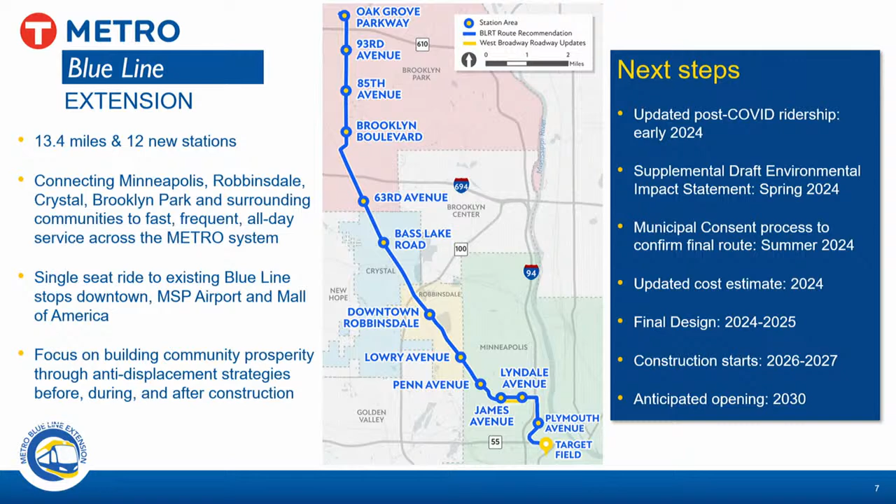We are working on post-COVID ridership, which will be ready by early 2024. The Federal Transit Administration wants us to do a blended ridership approach of pre-COVID and post-COVID ridership, as required in their modeling, and we're gathering data right now on the post-COVID condition to blend into that. You'll see that from us hopefully by the beginning of next year. I'll skip ahead on the rest of these items since I'll cover them in other slides.

We keep trying different routes and avenues to get to people because that's what we ultimately wanted to hear. We want to hear from you whether you support the project or not. We want to get those voices at the table. So we continue to adapt.

And then, of course, our anti-displacement work group. As I mentioned, there is a very complete summary of the quarterly engagement meeting in the packet, conducted August 23rd at the Capri. It was a corridor-wide presentation, followed by Q&A, and all of the Q&A are summarized in the packet provided for you today.

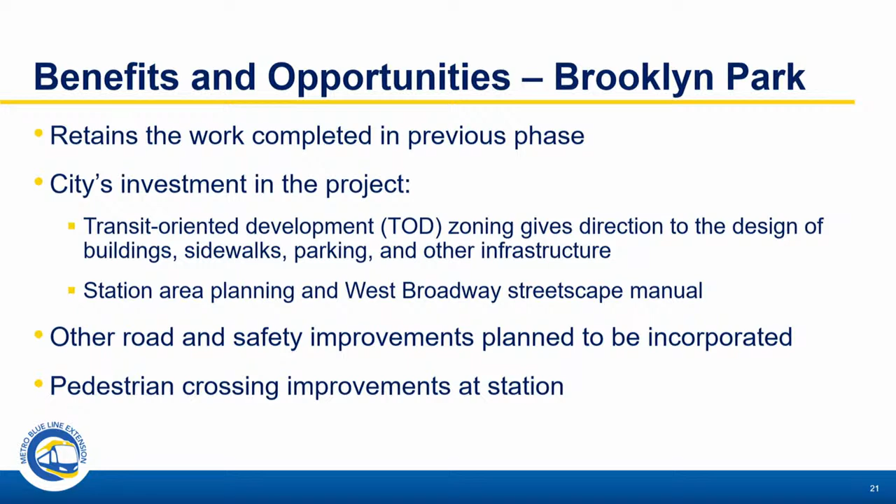We'll start up in Brooklyn Park, which is the area of this Blue Line extension that remains closest to the previous alignment we had before. Anywhere north of where we switched over to West Broadway stays pretty much the same. So we've already got a lot of TOD work, station area planning work, and West Broadway streetscape work that was done in previous years. That remains and continues to be part of what we're doing and moving forward.

We also have a station at Brooklyn Boulevard, with many residents there, also major retail destinations in and around there, and the Liberian Business Association's incubator, working with the city right at that stop as well. And then, of course, the fifth and southernmost stop, which is in Brooklyn Park but really serves residents from Brooklyn Center, Brooklyn Park, and Crystal, right in and around 63rd. These are the benefits and opportunities that are there.

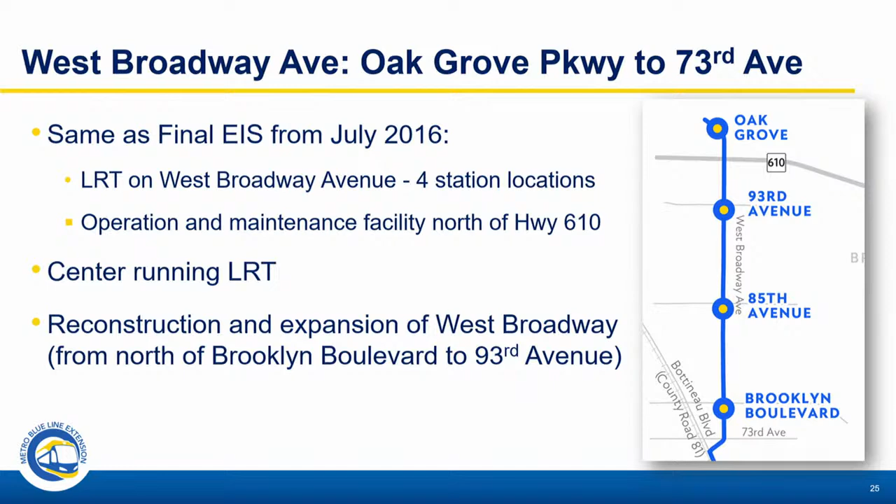The four stations along this segment start at Brooklyn Boulevard, which has a heavy bus connection, the Starlite Transit Center, and retail areas. 85th Avenue has North Hennepin Community College, the Hennepin County Library, and new housing being built. 93rd has a couple of hotels nearby, Takeda, Olympus, and other job opportunities. Oak Grove Station is the north end of the alignment, with a fairly good-sized north-end park and ride, opportunity for adjacent development, and the operations and maintenance facility located north here as well.

This is a reminder that this project had assumed building the operations and maintenance facility on existing City of Brooklyn Park property. Here's a rendering and drawing of where that is, on the relocated 101st, tying into a new Oak Grove Parkway connecting over to West Broadway. Just off-screen to the north is the fairly new 169/101st interchange. This is really the north end of the project with our building—this design is essentially completed, needs to be dusted off and put back in, but we'd still look to implement this operations and maintenance facility at the north end of the project.

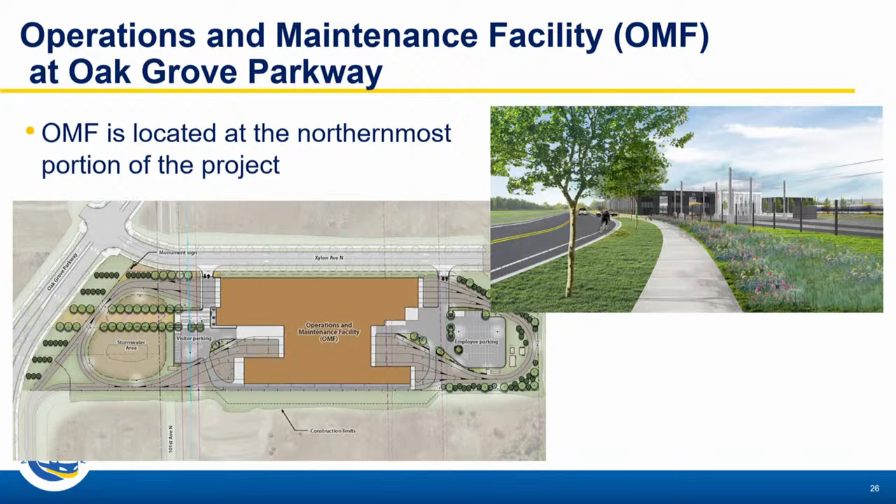This becomes the north end of the alignment. Do we have a comment here?

Very quickly—you mentioned their station area consultants. Do the stations not have all the same consultants, or did I mishear?

In round one, station area planning was done for each of the five cities—a couple of different consultants worked on it—covering Minneapolis, Golden Valley, Robbinsdale, Crystal, and Brooklyn Park. Brooklyn Park's planning mostly stays in place. We did some new station area planning in Crystal and Robbinsdale, and now we want to tackle station area planning around the Minneapolis stations as well.

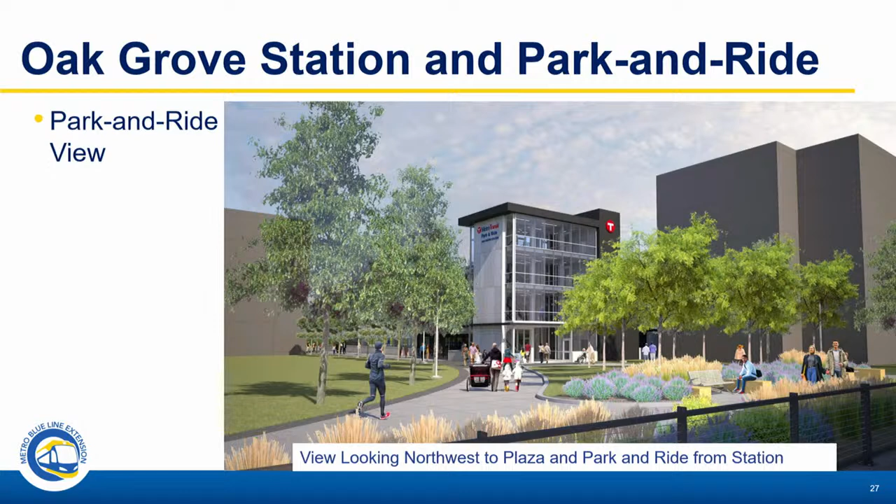So, Councilmember Kasham, you had a quick comment? Yes, and it's related to the Oak Grove station, Chair.

Okay, just go back for a second. So those black building structures that you said would have potentially underground parking, if I'm understanding correctly, would those black building structures potentially be businesses, or like retail, or multi-use? What is the concept of those buildings?

Chair, council member, that'll depend highly on City of Brooklyn Park's redevelopment efforts and land use planning in and around there. The property up around there is all owned by Target Corp. So when we've laid this out, we've laid it out to identify a roadway backbone and a light rail track backbone and a location for a park and ride, adjacent to the station, adjacent to the tracks, and adjacent to the roadways in that area. There's additional detail, how that all lays out and how it gets developed is going to be highly driven by the planning that takes place between the property owner, in this case Target, and any of their developers and the City of Brooklyn Park.

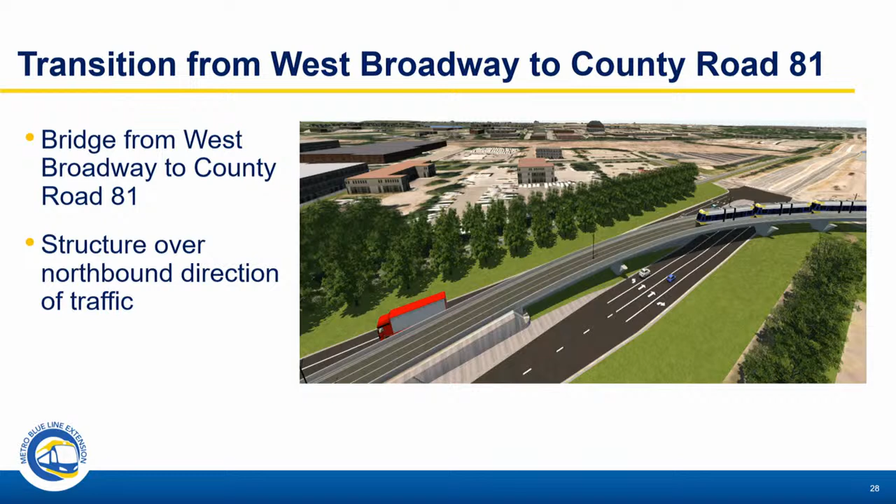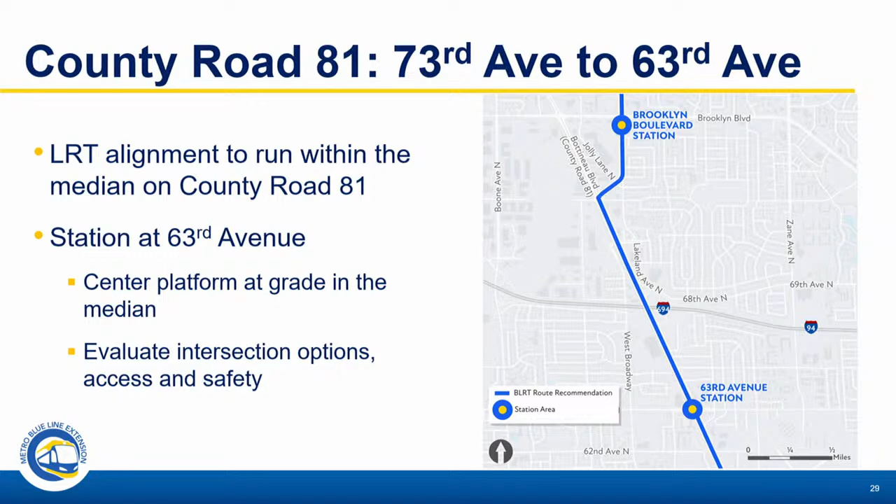It is the north end, so it's meant to capture potential riders from all the northern area. We're down past West Broadway, now onto Highway 81 for the first time, where the alignment differs from previous plans. We're close to the original alignment here in this piece of Brooklyn Park. We transition between north of 694 and 63rd, with center-running LRT on County Road 81, with a station at 63rd in the center of County Road 81 rather than on the railroad alignment next to it.

This rendering shows how we integrate the existing parking structure at 63rd, the Bottineau parking structure along 81. In the previous design, we had a Skyway bridge over the Burlington Northern Railroad tracks coming down onto the station platform. Now, since the platform is in the center of Highway 81, we have a Skyway bridge from the second floor that goes over both the BNSF railroad tracks and southbound County Road 81, then comes down onto the station platform. There's also an at-grade signalized intersection providing access for all quadrants at 63rd and County Road 81, as well as the 63rd station.

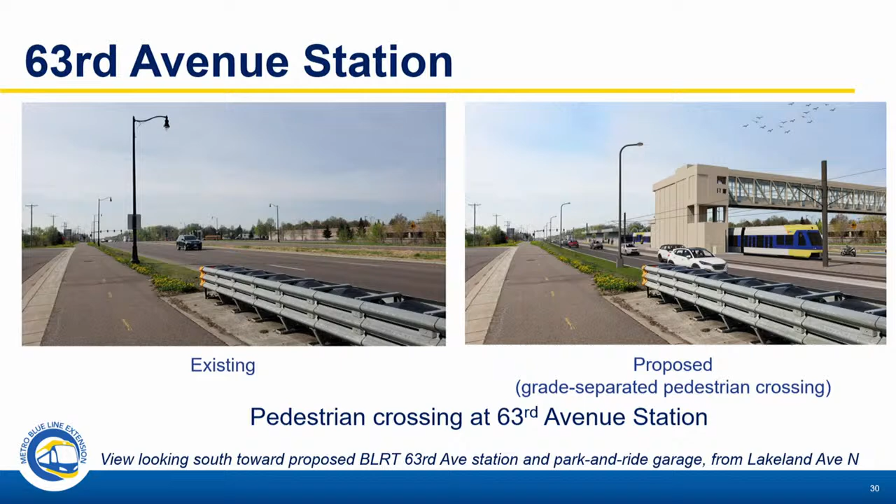So that really is Brooklyn Park's area. A lot of the design is already done, though we need to refresh different things. Even the environmental mitigations that were identified continue to move forward as part of the project.

Could I ask a question? I was looking at the slide referencing the 2016 environmental impact study. In this Brooklyn Park area, will you update the human chapter of the study to reflect today's demographics in those cities, or will you use the one from 2016?

Chair, we'll have to update everything - all the way from where we are now on endangered species, where we are on demographics, where we are on stormwater, since lots of regulations on stormwater treatment have changed over time. Each of those things will have to be updated as part of the draft environmental impact statement.

Now we enter into Crystal. The benefits and opportunities here include, from the Bass Lake Road Station, quite a few residential access and jobs access areas. We hope to provide a safe area and pedestrian pieces along here. We've engaged with a lot of residents and businesses in and around the Bass Lake Road intersection.

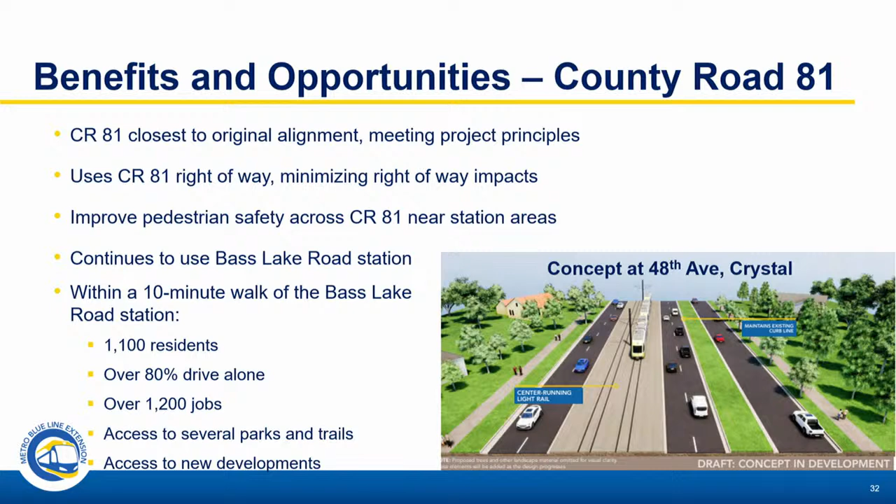Crystal is intended to be a shift from the BNSF railroad corridor to the east onto the County Road 81 corridor. In this case, it's primarily center-running at-grade on County Road 81, with a station at Bass Lake Road.

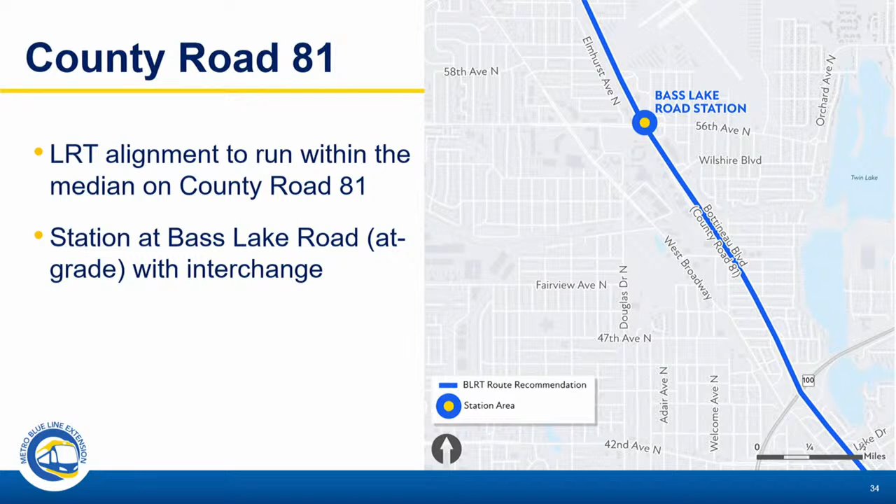As we analyzed traffic impacts, we identified that putting LRT at-grade on County Road 81 at Bass Lake Road would result in a negative level of service without improvements to that intersection. So we looked at the existing configuration, shown on the left - an existing 6-lane road with left and right turn lanes at Bass Lake Road. These are both county roads, this is a county road intersection. You can see on the right, looking north, and we are recommending a grade-separated interchange replacing the at-grade intersection.

So what does that mean? It means the heaviest traffic volumes at this intersection - north-south traffic on County Road 81 - will continue north and south over Bass Lake Road without stopping.

Access to and from Bass Lake Road onto 81 will be via a tight diamond intersection configuration, with ramps on and off of County Road 81. LRT will remain at grade through this area, with a station that allows pedestrian access without having to cross the higher speed, higher volume County Road 81 travel lanes. The county doesn't have many county road interchanges, so this is one of the firsts. If we were just talking about an interchange to solve traffic, this might not be the solution, but an interchange that solves traffic problems while providing a pedestrian environment to a light rail station rose to the top as our recommended alternative.

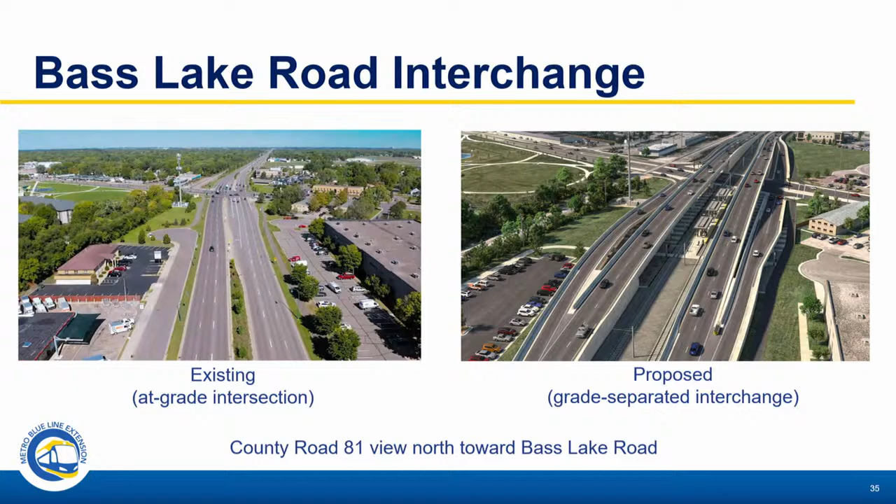You'll see a bit more detail here - the BNSF tracks are off to the left, and that's the cell phone tower area right south of Bass Lake Road. Up on the left you can see where the ramps come in, and how LRT is at grade in the center with a center station platform between north and southbound light rail tracks, with pedestrian crossings to it. Rather than using walls along either side to build up the ramps, we're building them via piers so you can see through, allowing light through and creating an open space so pedestrians can move through.

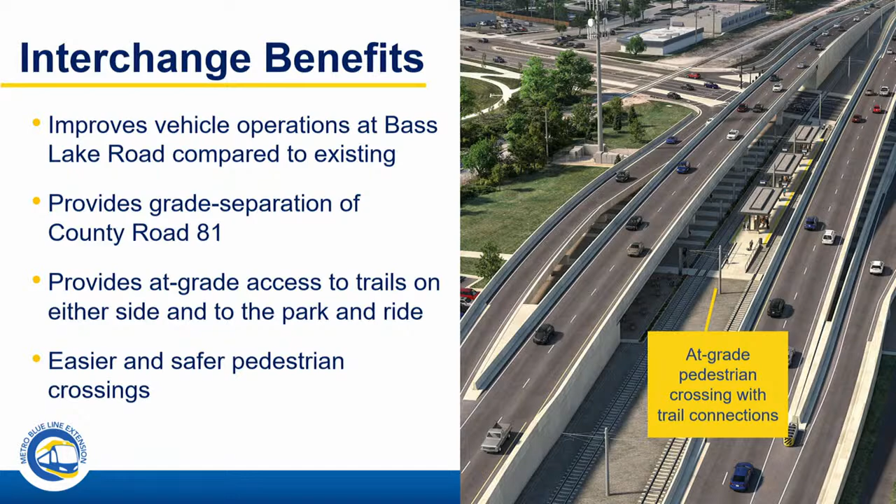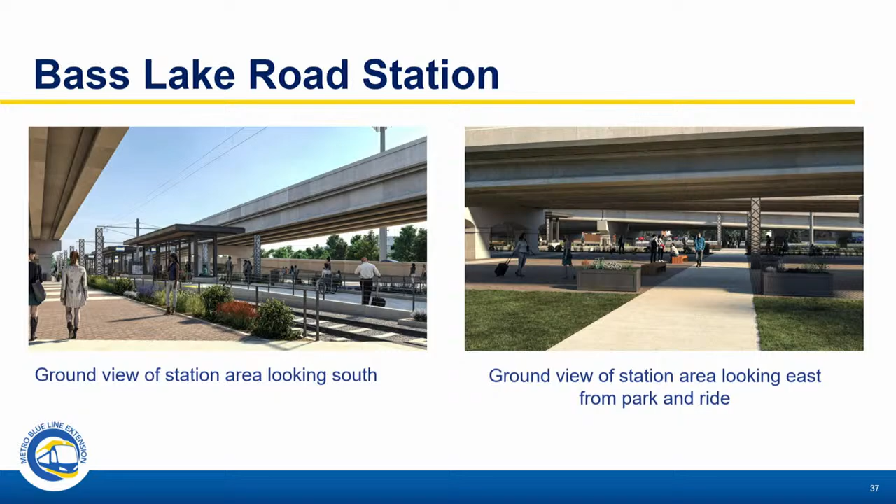That's the primary Crystal piece. The other thing I'll mention before we move to Robbinsdale is that we're making sure we continue to have in Crystal what exists today - three lanes going south as you come onto Highway 100, where the right through lane drops into an on-ramp onto Highway 100. We're introducing that third lane going south again in the new design, which then drops directly onto Highway 100. That's been a very beneficial piece, and it's really another traffic improvement needed to pull this together. So that represents what we're doing in Crystal.

Oh, I'm sorry, Mayor. Thanks.

Just a couple comments to add on to some of our concerns. We already talked about the service in Crystal, so I won't rehash that. 2.5 to 3 years ago, when we started this new process and new alignment, we talked about trust, and a lot of that came from the old alignment and the pedestrian bridge associated with it. In this process, as far as trying to regain and be engaged to rebuild that trust, I don't think we've made any progress. If I were to guess, I'd say we've gone the other direction in terms of our transit in Crystal. It really feels disingenuous.

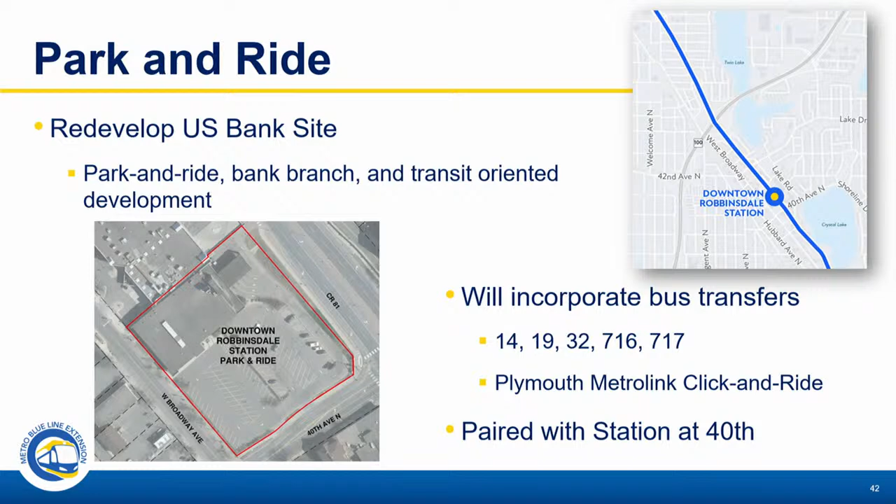The other piece that becomes part of this is currently the bus operations in Robbinsdale are at the Hubbard Building. The Hubbard Building could become available for future development as well, because we would look to merge the bus connections, the park and ride locations, and light rail access on this particular piece. So all of that comes together. Here's a little bit of a rendering of what this might look like.

This is looking north. You can see light rail tracks in the middle, and that's the current US Bank building on the left. Now, this recommendation today recommends an alignment for light rail in the center of 81, but we are also still discussing with the city the possibility of this being at grade or possibly elevated through portions of this segment of 81.

That elevated section could begin at 40th, and go through 41st and 42nd at grade or elevated. That'll be part of our ongoing work as we move towards municipal consent to nail down what the station track configuration through here would be.

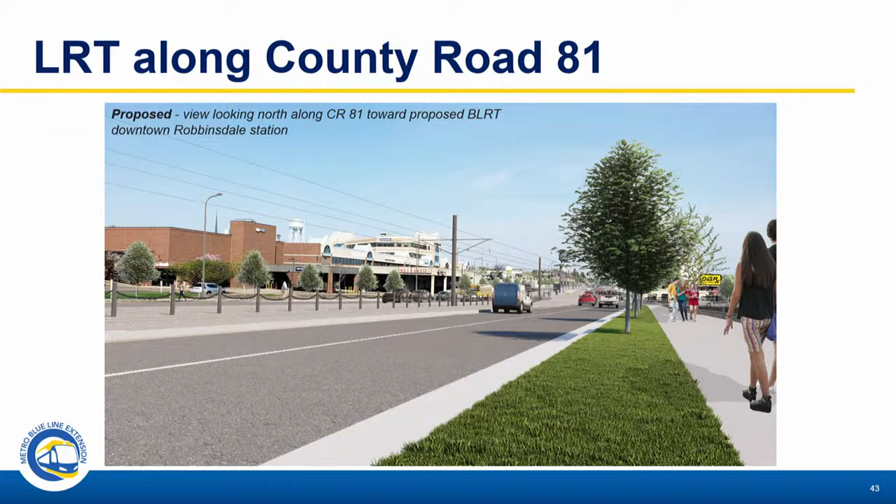Now, right on the border, you see the North Memorial Hospital campus. Right on the border is where we have anticipated building a Lowry station. The idea for the tracks through here is that they will continue from the center of 81 in Robbinsdale to the center of West Broadway in Minneapolis.

Right in the middle of that oval is where Hennepin County, Minneapolis Park Board, City of Robbinsdale, and City of Minneapolis just recently completed construction of the new roadway bridges over that area. We had been advancing what you see as the lighter dotted line on that curve through there, bringing the tracks up elevated around the park areas, with an elevated station in the air that would have vertical circulation connection down around Oakdale, serving North Memorial Hospital, and then the line would come back down at grade on 81.

We've been in the public with that for quite a while. I can say I didn't feel a lot of love at the Minneapolis Park Board with that alignment, President Forney. We certainly saw some eyebrows raised at the Minneapolis Council meeting about that.

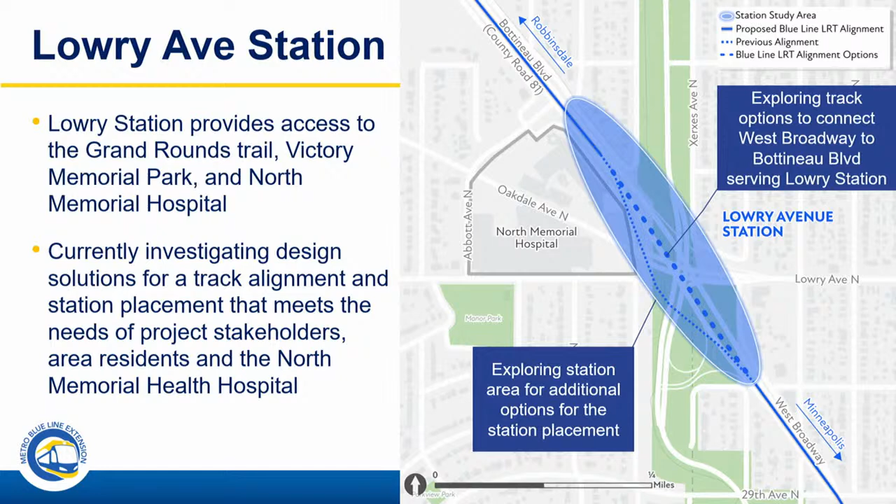Commissioner Forney. Thank you. Feeling the love, right?

Being that once you get into Minneapolis, there is no park and ride that's allowed, is this an area that has been considered for park and ride?

Well, we talked a little bit. I will say the hospital has expressed the fact that they probably have more parking than they need even today. Is there a possibility? Of course, it would take some finagling to make it work, since park and rides need to be free, so some of the parking would need to not be part of their system. That was a little bit of discussion.

We have not looked to buy property at this point in and around here as a potential place for a park and ride. If you remember, in the previous design, we were going to purchase a piece of property from the park board to have a fairly small lot right there at Golden Valley Road and Theodore Wirth Parkway.

I'm not advocating one way or the other, I just wondered if it was any consideration. Not at this time, yet.

Councilmember: I appreciate that Commissioner Fernando already brought up Golden Valley's letter. We anticipate that most Golden Valley residents, particularly those in the Northeast who've worked for over a decade to envision and bring Blue Line transit to the Northwest Metro, will connect up. I urge you to look at that letter, because we're interested in bike and pedestrian connections to this Grand Round system and the Three Rivers investments happening just south of here in Sochacki Park, including completing their Three Rivers Park Trail that will go along Golden Valley Road and lead into the Grand Round system.

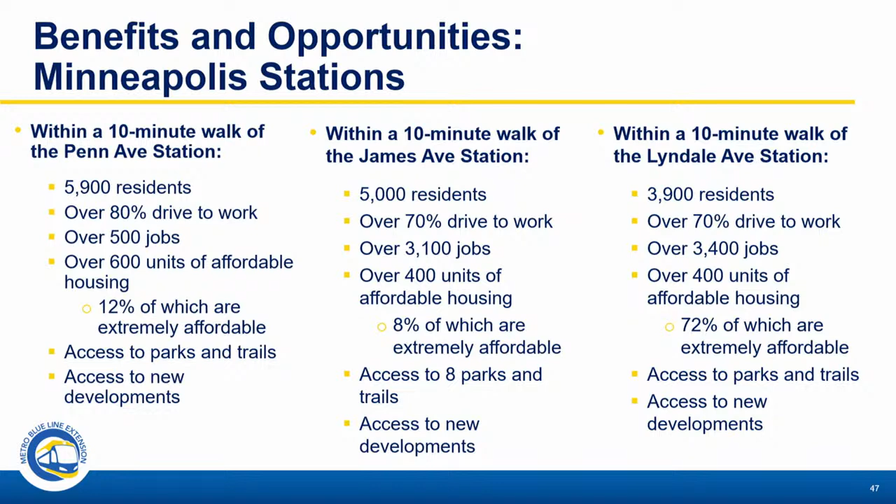Here's some things at a high level, from Penn Avenue: 5,900, 5,000, 3,900. There are a lot of residents living in and around here. Especially as you get closer to I-94, there are a lot of jobs and a lot of access to transit. This is currently a very highly transit-utilized segment of the city of Minneapolis.

Also, why east of 94? We've gone away from recommending Lyndale. We're talking now about coming down Washington Avenue and being east of 94. What does that mean? We think it allows it to complement the C-Line and D-Line, which run north and south through the communities on the west side of I-94, and creates a new connection across 94. We think that helps. It also gets us a little closer to North Loop, which, as we've talked to North Loop residents, they see the Target Field Station as theirs, but this starts to be part of an opportunity there as well.

There are many residences and lots of jobs in and around this area as well. We've had a lot of engagement, and we've talked a lot about impacts, crime, business impacts, and anti-displacement, and the things Councilmember Ellison brought up about — what I use all the time is — nervousness about what this will mean.

What will it mean? We've heard people say yes, we've heard people say no, and we've heard a lot of people say, I just don't know where to be on this yet. So that's a lot of what we've done in engagement.

Here's a little bit of our engagement. Since we've focused on the east side of 94, we've ramped up a lot of work there. We had our first quarterly meeting, held at the Capri on the north side. We continue to meet and have regular events all the time in Minneapolis.

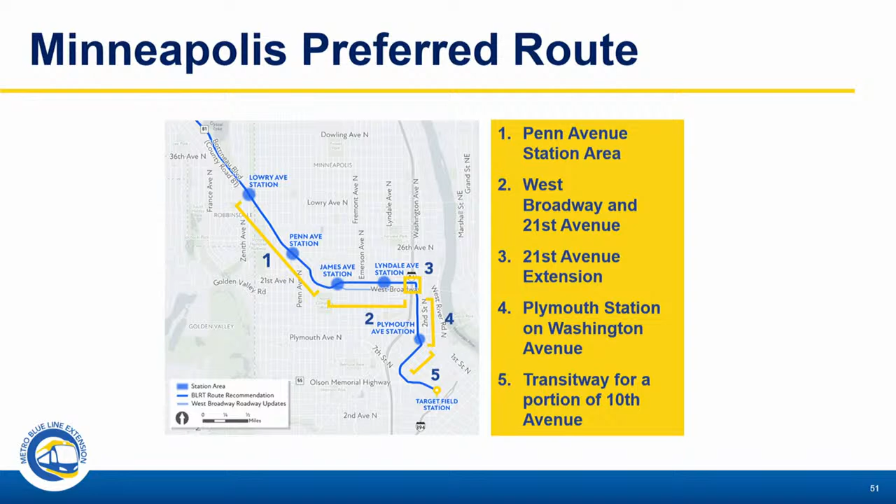So what it summarizes is here is what we are recommending as our preferred route in Minneapolis, and it breaks down into these 5 areas. Essentially West Broadway down to James, tracks on 21st from the James area over to Washington Avenue with improvements on West Broadway, along Washington Avenue to 10th Avenue, 10th Avenue to Oak Lake to 7th Street and to Target Field.

The Penn Station is one where we're proposing to have a station there. We'd have center running LRT. And yes, we will certainly allude to the fact that both with the proposal for Neon to work with the food incubator and LRT, parking is an issue around the Penn Station, and it's one that we will have to address in detail as we move forward.

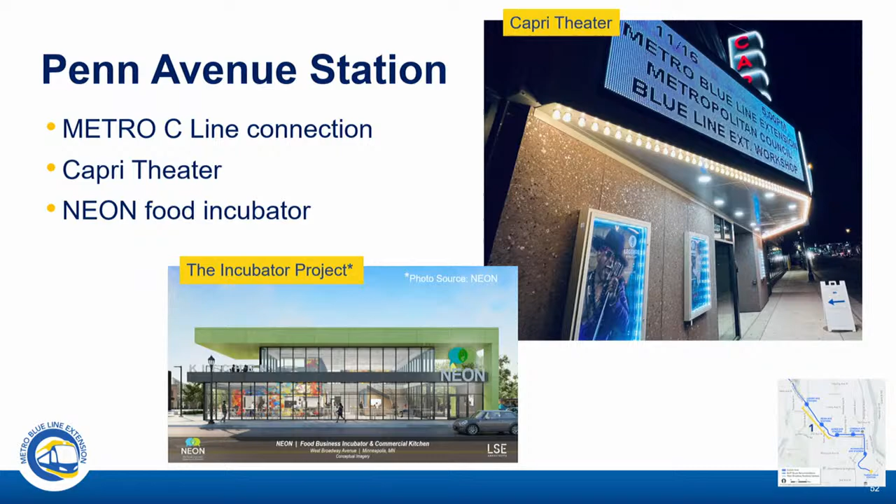Of course, it connects to the C-Line here, as well as the Capri and other destinations along the Penn Avenue area. This shows a little bit of a rendering of what the West Broadway and 21st area looks like.

Our proposal is to have a station on that diagonal in and around James. We see that as a significant station to serve North Commons Park and the Davis Center and businesses and residential areas on that side of the north side.

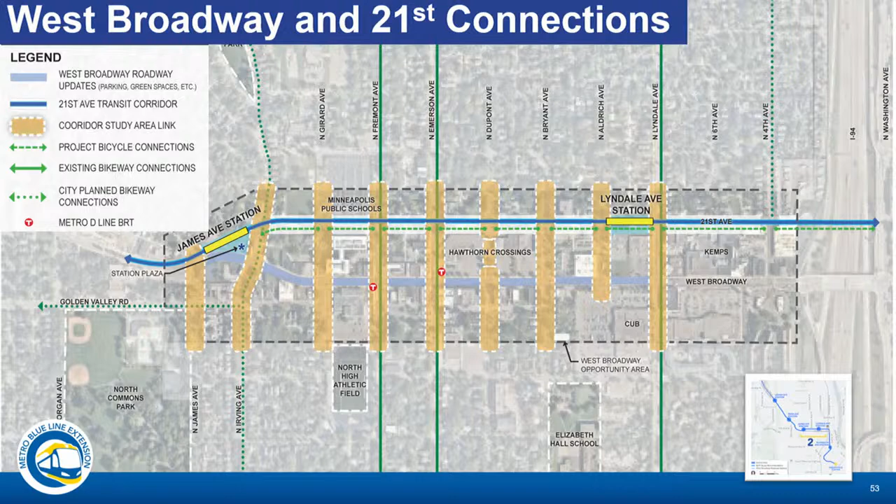We look then to continue the tracks along 21st behind the public school headquarters at the Davis Center, with a station at Lyndale right by Sanctuary Church, right before you get to Lyndale Avenue, a station on 21st. And then you'll also see below, the blue represents what we hope to do along West Broadway.

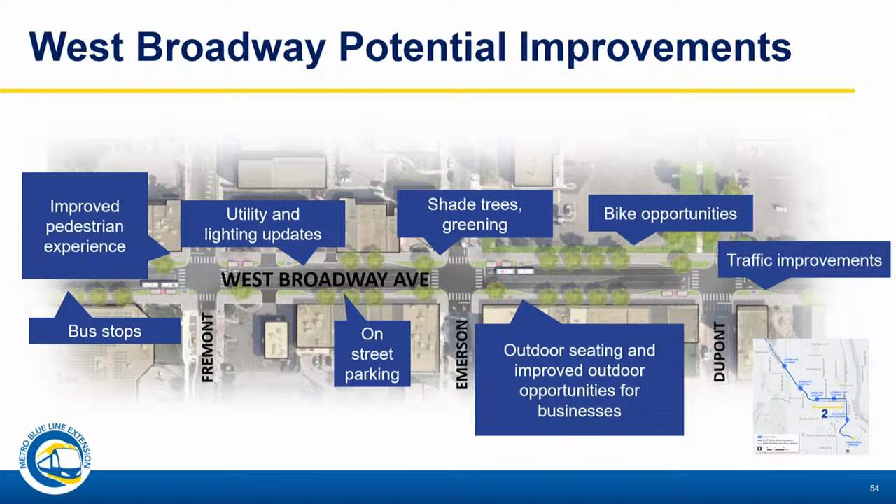Included as part of the project is to reconstruct West Broadway as a street, to utilize this for parking and other modal access along here, but not have tracks here and not to have additional right-of-way acquisition along West Broadway.

We continue along past Lyndale. We are proposing to continue on 21st behind Kemps and then build a bridge over I-94 that will be for light rail trains to connect from west of 94 to Washington Avenue, but also to look to connect and provide connections for bicycles, pedestrians, and maybe vehicular traffic as well. Just hoping to fill that gap that is there from I-94 and provide another crossing.

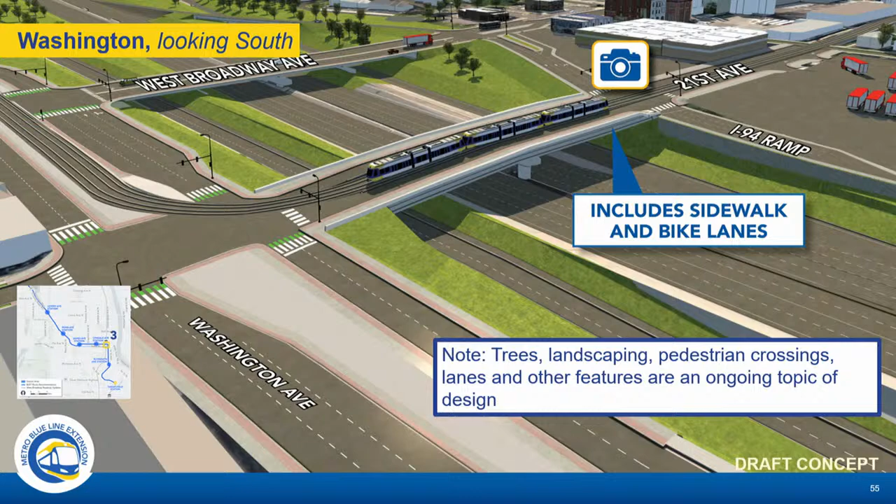Here's another potential rendering of what this could look like. You heard today about this being a ramp area, and we've researched a number of ways to separate the ramp from the crossing here, and we can continue to look at that, but we definitely want to get a bridge that comes across here to provide another connection. Also then to potentially reduce impacts that are currently there and maybe move opportunities that are on West Broadway, or the current West Broadway crossing, elsewhere.

So then we make a turn and we propose to come down Washington Avenue, with a station on Plymouth, or right about Plymouth, just south of Plymouth, between Plymouth and 10th Avenue, and then to turn and come down 10th Avenue through this area.

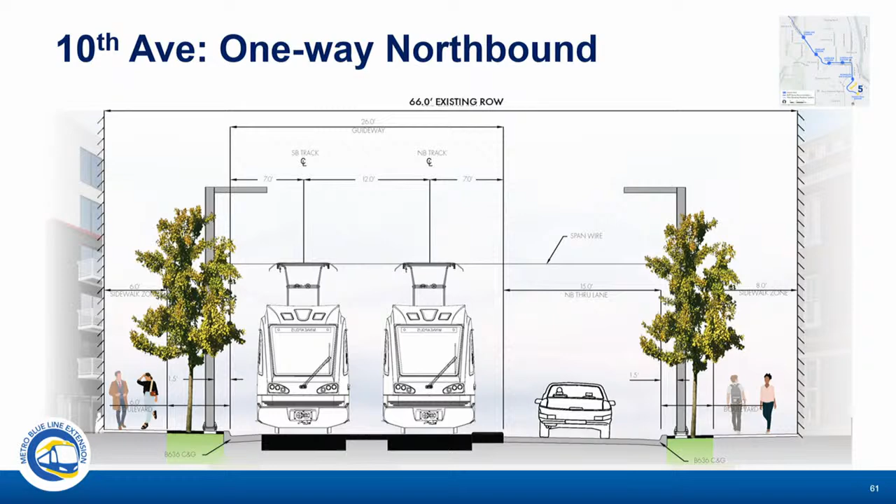So each of these, either a transit mall with just bikes or a one-way northbound option, has its own traffic impacts. This is just a sample of the kind of things we're going to have to dig deep into — where traffic gets relocated, how we serve both traffic wanting to use 10th Avenue to get through, and how we want to serve direct driveway access here.

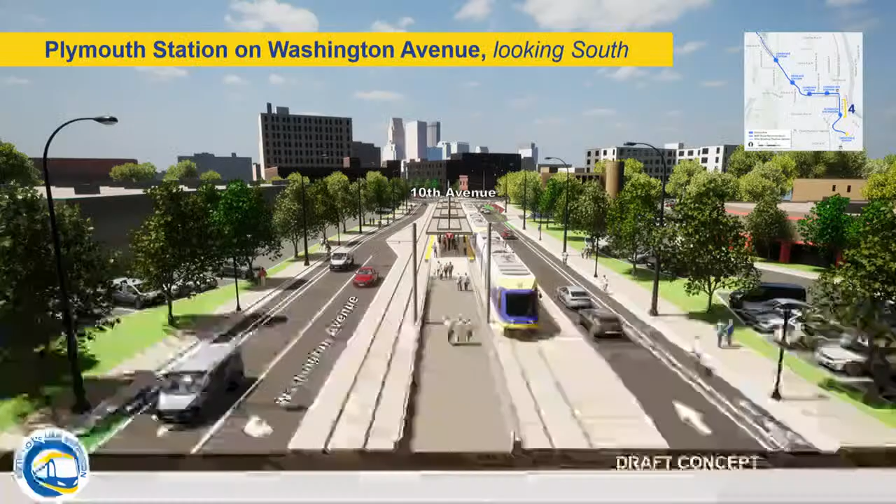I just want to go back quickly because I skipped it. This is a rendering of what a station platform would look like, looking south on Washington Avenue. If we had a center platform just beyond Plymouth, you can see 10th Avenue in the distance — this is on the north end of the North Loop as well, with a center platform there on Washington Avenue.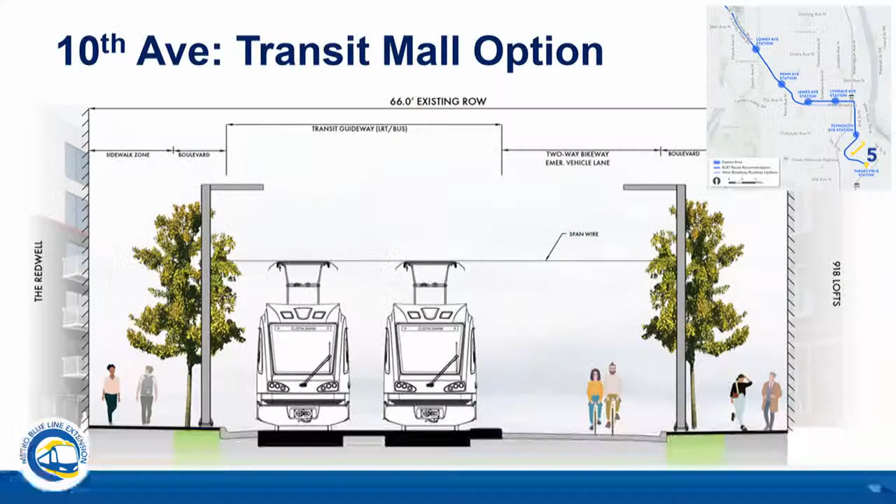From there we make the turn — you can see the blue there. We would make the turn, come down 10th Avenue and up to Target Field Station. So that is really the alignment with our recommended route.

You can see there are still some shifts in a bit of where the track or stations would go, but we consider them minor shifts relative to the overall impact of a whole other street or alternative. At this point, we really want to nail it down to a specific route through here.

This is the route. What we presented to this committee today is a resolution that would acknowledge this route and recommend it to move through the supplemental draft environmental impact statement. It recommends that we continue to advance design, and commits to working with stakeholders on mitigation measures as part of that environmental study. Even on this resolution, the Corridor Management Committee is asking us to continue our efforts around community prosperity, anti-displacement, and those benefits, and to keep advancing this work.

Dan, thank you, that was a lot — it both went deeper and summarized what we've been looking at over a number of months. Just to review where we are: the environmental review begins in the federal process with the FTA as early as October. This proposed resolution provides enough flexibility that in these station areas, and even some routing areas, this is a recommended route, but within that recommendation there's continuing work we'll be exploring — part of that is measuring impacts and identifying mitigation strategies, all as part of the SDEIS.